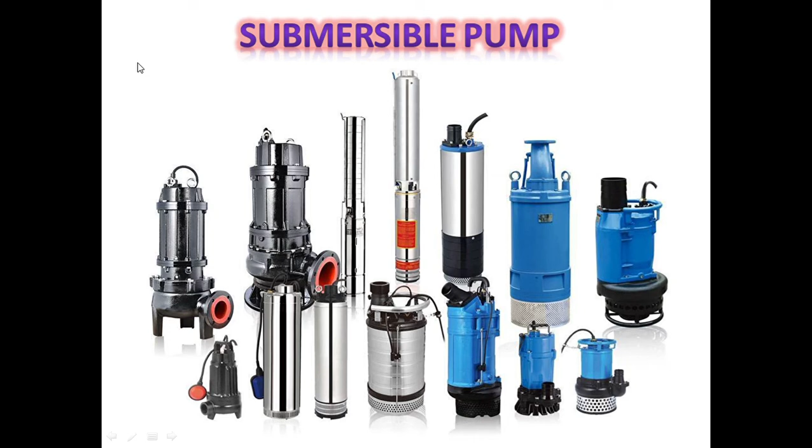Welcome again. We will resume our discussion with submersible pump.

Various varieties of submersible pumps are shown in this figure. So this is how the commercially available submersible pump looks like. Let us go into the details. But before that, just give a look to this word submersible. It means the thing which can be submerged, kept under water or liquid. So it is very obvious that this is a pump which can be submerged into the water.

But the problem is most of the designs come with the motor itself. Means in a single pack you have motor and impeller and casing assembly. So whenever you submerge the pump into the water or liquid, the electric motor also will have to be submerged. And there the short circuit problem may take place.

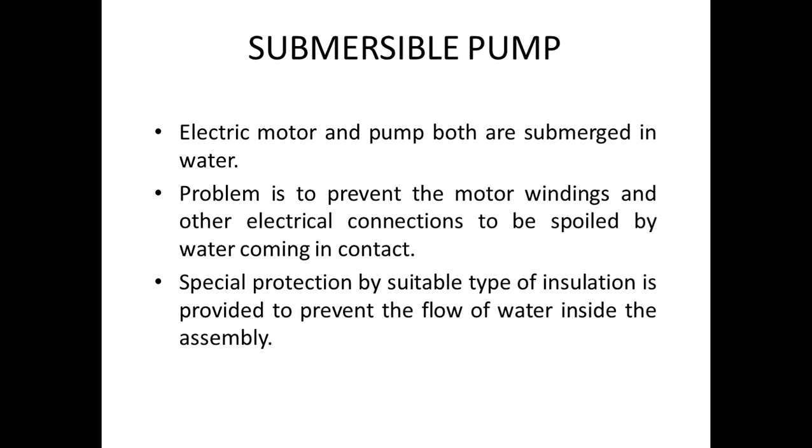But this is avoided with the development of technology. It became possible to provide special protection to all these electrical parts and avoid the entry of water into this section. So with this development, we could develop this submersible pump also. So we have these electrical compartments specially insulated so that this problem will not occur.

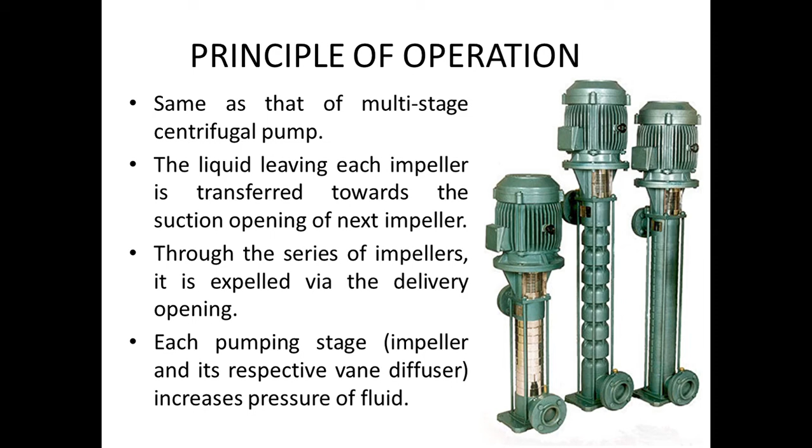These submersible pumps are similar to multi-stage centrifugal pump. As you can see here, we have various stages which are connected in series. So the liquid leaving each impeller is transferred towards the suction opening of the next impeller, and lastly it is connected to the delivery pipe. Each pumping stage, that is impeller and its casing or diffuser, increases the pressure of the liquid.

Advantage: it provides significant lifting force as it doesn't rely on external air pressure to lift the fluid. What it means, we have seen in the earlier design, the suction pressure created at the inlet of the impeller, that is eye of the impeller, can be maximum up to atmospheric pressure minus vapor pressure. So there is limitation there. Otherwise, cavitation will take place and it will affect the performance of the pump.

But here, the pumps are submerged into the water and there is a positive head acting at the suction side, and that's why these limitations are not there in submersible pump. There are no suction losses. Obviously, the suction pipe itself is having the positive pressure, and that's why the related losses are avoided.

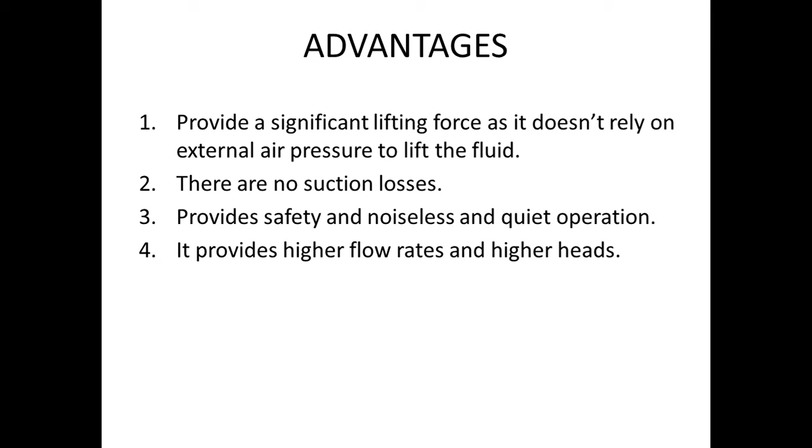Provides safety and noiseless and quiet operation being submerged in water. Provides higher flow rates and higher heads because all the energy or the head supplied by the impeller can be used as a delivery head, so it can give comparatively higher heads.

Applications: these pumps are used for drainage, sewage pumping, general industrial pumping, slurry pumping, and it is suitable for water supply from wells or reservoirs for domestic use, for civil and industrial applications and irrigation. See, these sound similar to earlier applications. Of course, it is similar to centrifugal pump. That's why applications are also similar. But here you can submerge it into the water, and that's why the suction head dropping below the vapor pressure and leading to cavitation can be avoided.

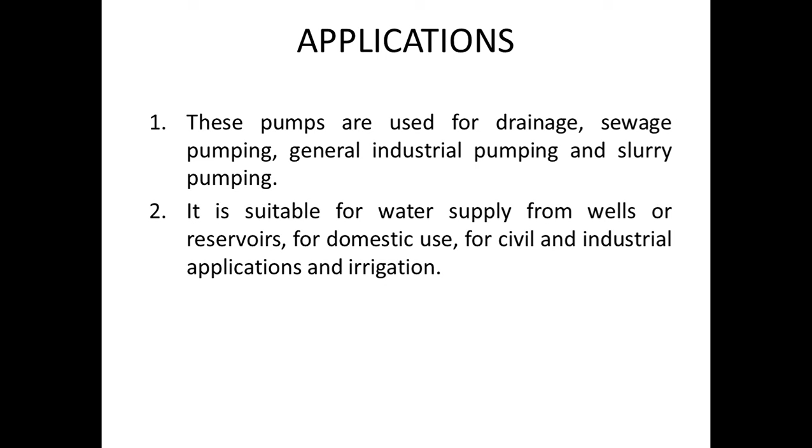Or it can be used in vending machines where the pump itself is submerged into the liquid which is to be supplied. So in our day-to-day life we are using a lot of vending machines for different liquids. So there this pump can be used. So applications are similar, but mind well that here we are submerging the pump into the liquid. So that is the difference.

Now jet pump. We have already seen something about jet pump when we were discussing priming of centrifugal pump and self-priming devices. There we have used jet pump for priming purposes. So it is the same jet pump. So it can be used in combination with centrifugal pump as a self-priming device, or in its simplest form it can be used as a separate jet pump, which consists of a pipe having a convergent end at its bottom, and other end of the pipe is connected to delivery pipe. The upper end of the pipe leads to the required height, and it is generally used for lifting water for boilers.

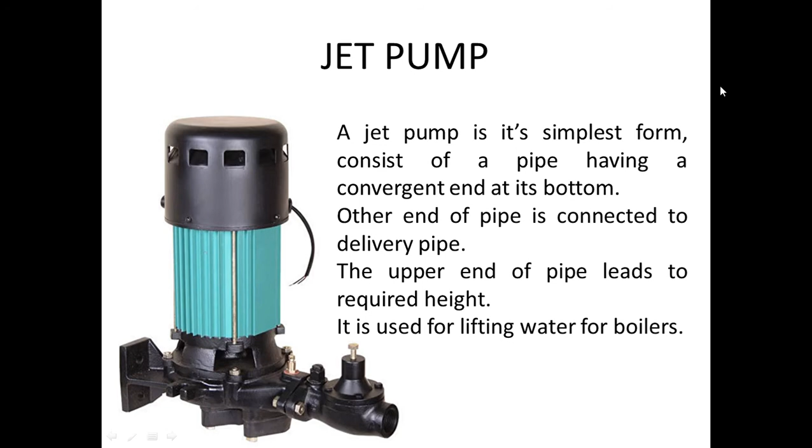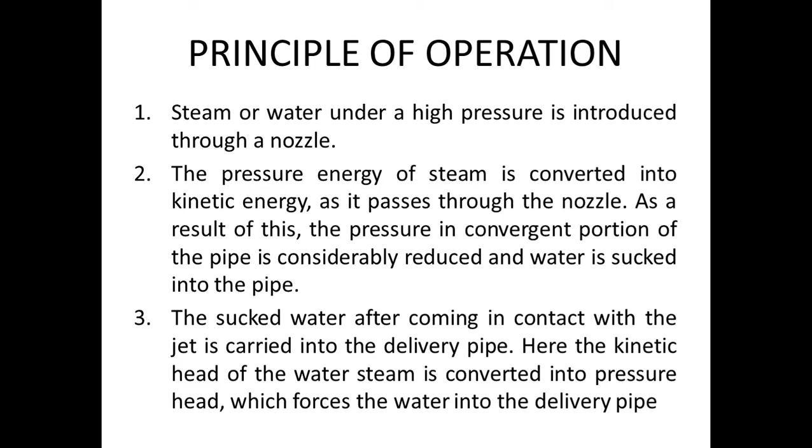It can be used for steam as well as water. So steam or water under high pressure is introduced through a nozzle. So there is requirement of water tank or high pressure steam available somewhere. The pressure energy of steam is converted into kinetic energy as it passes through a nozzle. I will show you in the next slide a figure where this construction is shown. As a result of this, the pressure in convergent portion of the pipe is considerably reduced and water is sucked into the pipe. The sucked water, after coming in contact with the jet, is carried into the delivery pipe. Here the kinetic head of the water stream is converted into pressure head, which forces the water into the delivery pipe.